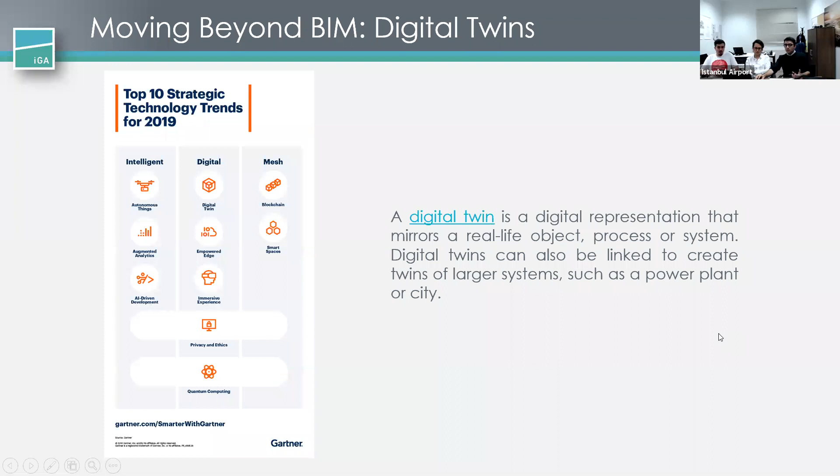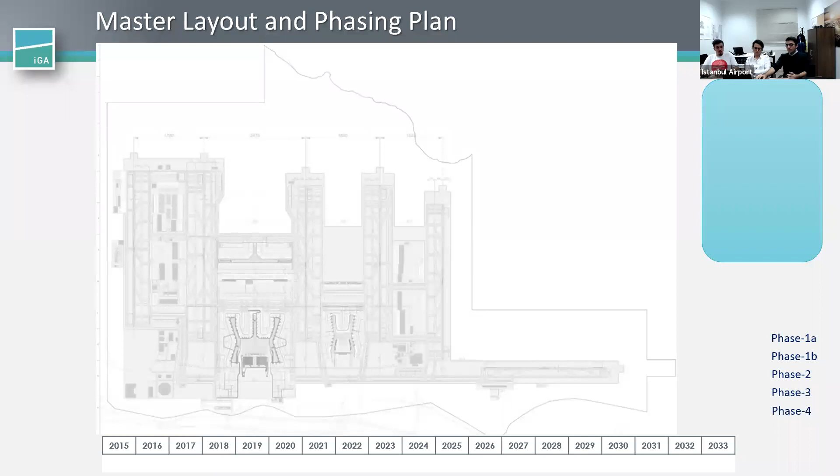Okay, so we will have some information on Istanbul Airport. We have 4 phases. So you are seeing the master plan right now. Being the world's largest airport project, the project scope consists of 4 phases. We have finished 1A right now, which includes a terminal building, 2 runways, supporting facilities, ATC tower, air traffic control tower, fuel farm, and cargo.

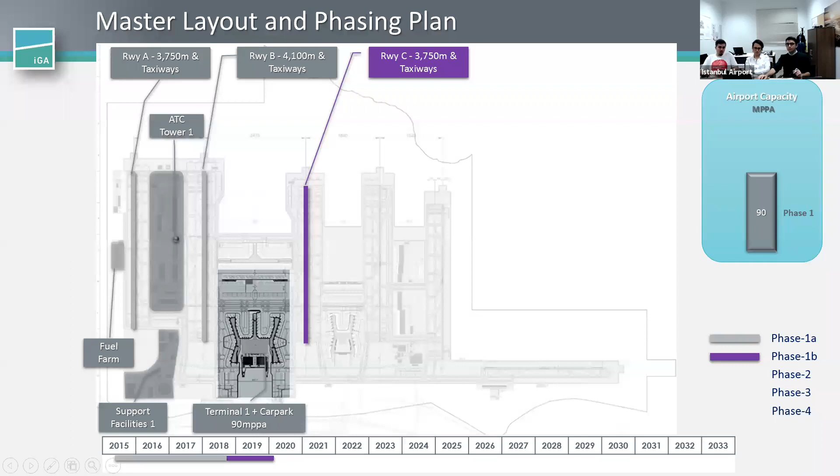And the Terminal 1 building includes an open car park which covers 700,000 square meters and more than 50,000 car capacity. And as I said, the first phase includes 3 runways, of which we have completed the construction of 2 runways. The third one is under construction right now. And the later phases include 1 satellite terminal and 3 more runways.

The total project area consists of 76 million square meters, where we will have 200 million passengers per year. Also, 350 destinations all over the world will be operating from it. So Istanbul Airport will be the very major hub that connects the entire world.

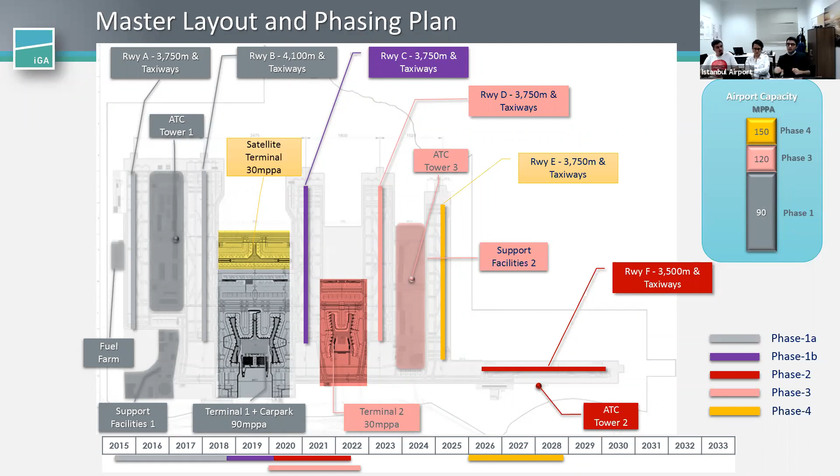So let's look at the project timeline. It's very interesting because the construction size is very huge. So a tremendous amount of coordination has been held, and a huge amount of effort, because there was a very, very tight schedule, 42 months of construction period. For this size of airport it is a very, very tight schedule.

An airport of this size would normally take twice or maybe triple that to be constructed. So we are at the end of this construction period right now. Right now the airport operation has started. We are in the 25 years of operational period right now.

So, looking at the economic impacts, by 2025 the airport will be facilitating 225,000 employees. So a huge amount of value will be added, nearly $40 billion. The project budget is also 22.2 billion euros, plus the taxes to government, which will be paid yearly over a 25-year period. So this is a very high budget.

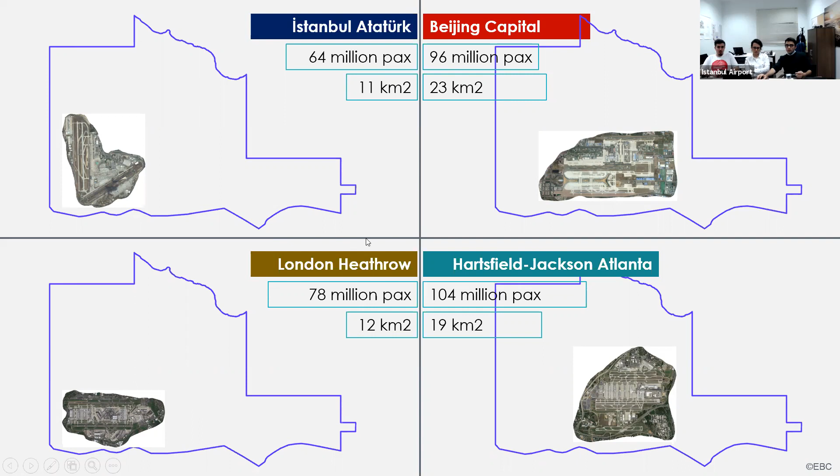So here, you can see the comparison with the known airports and the old airport in Istanbul, which is Istanbul Atatürk Airport. So you can see the concession lines, boundaries, the purple lines. Istanbul Airport has these master plan boundaries, and you can see Beijing Capital, London Heathrow, and Hartsfield-Jackson Atlanta, and compared to their passenger capacity, Istanbul Airport is one of the world's largest.

Also, having the largest airport, we have had very tough transfer operations, because we had to transfer an entire airport from one airport to another, and this was planned 18 months before the opening day. In terms of operational readiness, we call it ORAT, operational readiness and airport transfer. BIM is fully used for enhanced reporting and execution of the operational readiness and airport transfer plan.

So the preparations for the airport transfer, as I said, started 18 months earlier, including the commissioning phase. Transfer from Atatürk Airport was planned to be done in 45 hours, but we completed it in only 36 hours without any major issue, actually. And full operations were started on day one without any problem. It was the 7th of April 2019.

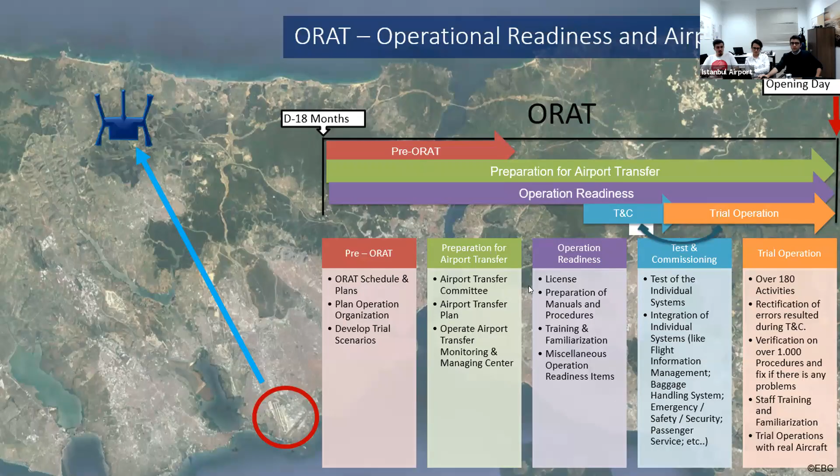So this shows one of the enhanced reports where we use BIM models for operational readiness and transfer. We use mainly Autodesk tools, BIM 360 for site reporting, and Navisworks and Revit for collaboration and coordination. This is one of our ORAT phase reports. I have to mention that.

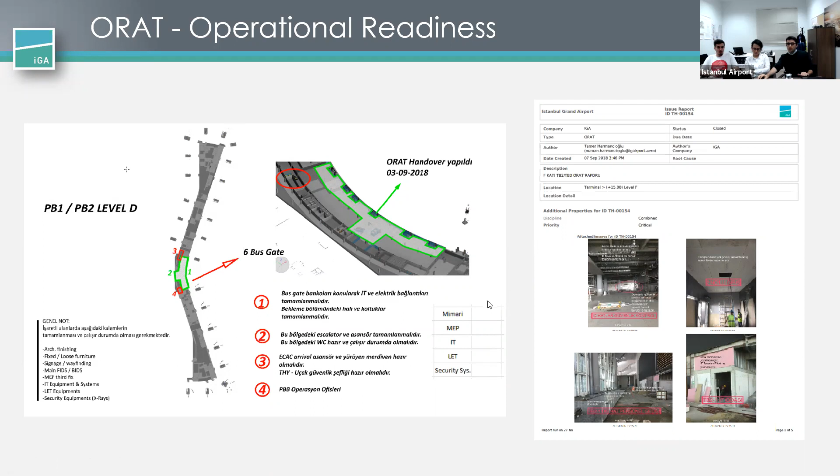So our team has also prepared an airport transfer simulation with InfraWorks that calculated the best routings for transfer trucks, low beds, and other aviation equipment. And determining the parking positions was very important. So more than 1,800 trucks delivered equipment during the process. So this was a huge transfer, I can say.

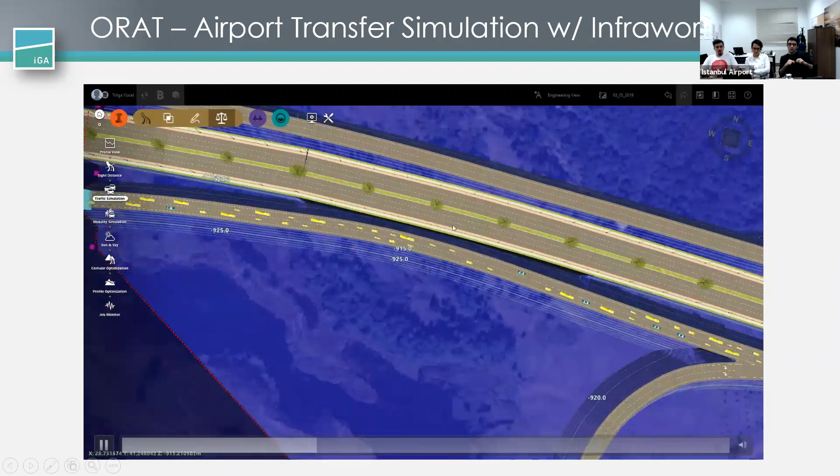So the traffic was also included in the calculations, and all the trucks, when they are leaving the starting point and when they are arriving at the destination point, all of them were integrated in InfraWorks, and we had this simulation to further enhance the transfer process.

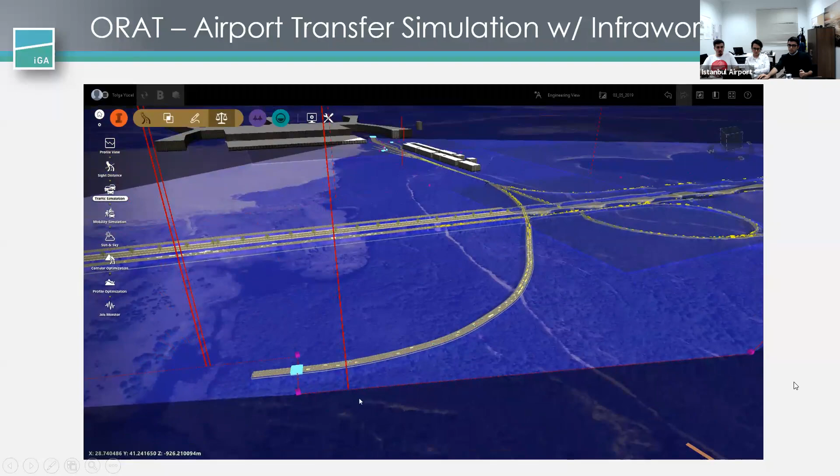Yeah, so we can now start with how we implemented BIM in this huge project. This is the basic BIM project lifecycle you mostly are familiar with. In my opinion, the first important step in a successful BIM project lifecycle is utilizing and maintaining the correct, clash-free, carefully engineered design. And the second important step is to deliver this correct design to site on time and let the right people reach the information without any restrictions.

So if you don't have the correct product, then it is nonsensical to even try to plan and deliver it to the construction. So it is very hard to finish the project on time and on budget, actually. And lastly, we are moving forward to BIM-based facility management. And we are having the huge benefit of implementing BIM for all of the phases in the project, which we will be talking about.

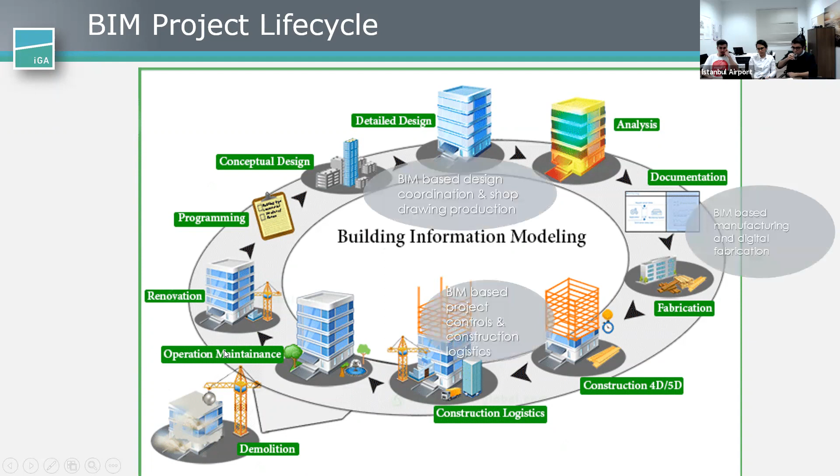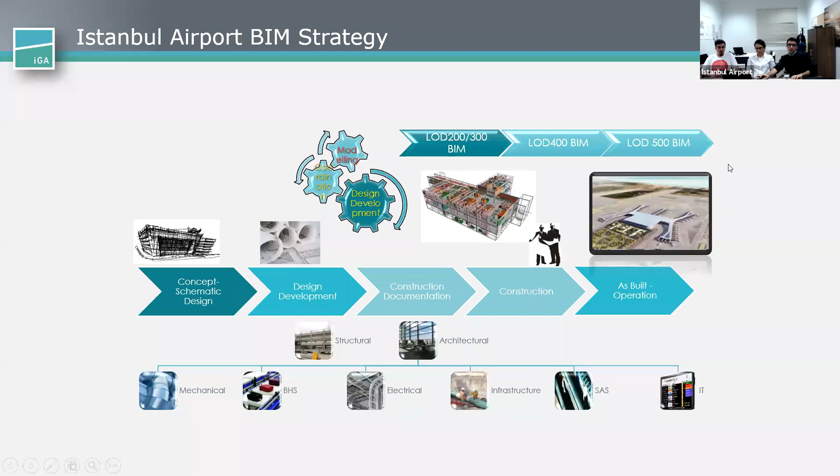So to fully integrate BIM for our project, the strategy was collaborating and coordinating all the parties, all the disciplines, including mechanical, electrical, structural, special airport systems, infrastructural systems, ICT, architectural and structural. During the project lifecycle, we have created our modeling strategy in a developing manner to match the very tight construction schedule. So at the beginning, you just cannot do everything at once. So we started from the base and we have constructed it until the operational phase, which you can see here. We started with LOD 200, 300, and we are now at LOD 500 as a development level of BIM.

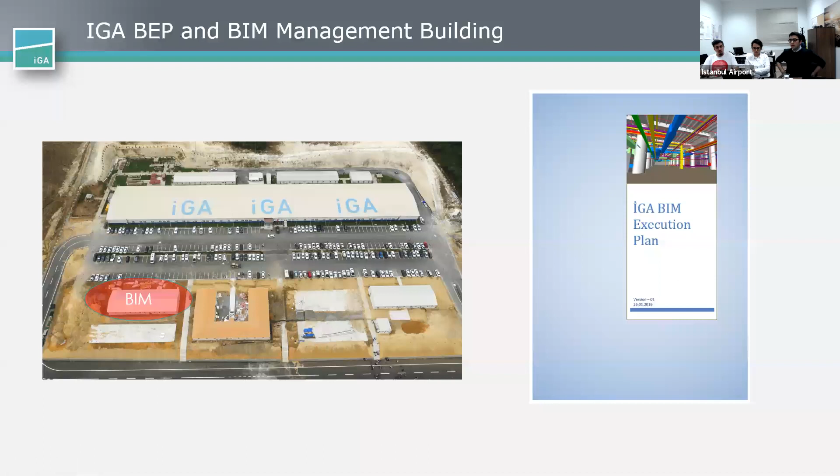Actually, what we have in this project is parallel design and construction. So we didn't have a design period before the construction. Design and construction effort was parallel, at the same time. So this is why we had a very tough period of construction. So you can see at the right hand side the BIM execution plan, which has been distributed to all the subcontractors, all the parties, internal and international.

Talking about BIM and BIM implementation, we have to mention that it is very important to apply good governance for successful project management. So these simple notions are very, very essential for successful project delivery and at the core of applying good governance in your team and even in your company. So if only one of them is absent, then you will likely struggle at some point. Let's look at them shortly.

So consistency, responsibility, accountability, fairness, transparency, effectiveness, and deployment. So if you are doing good governance in the entire project, you are likely to be successful. So one of the core necessities for BIM implementation is applying and understanding the importance of good governance, actually.

So in general, I can say that there are challenges when implementing BIM. So this is a general case. Especially in developing countries, especially in Turkey, challenges against implementing BIM can be described as overcoming the resistance to change and getting people to understand the potential and the value of BIM over conventional project coordination, and adapting existing workflows to lean-oriented processes. Also training people in BIM or finding employees who understand BIM.

Now we can look at the design and engineering coordination phase. So this is our schematic graphic for the integration of the entire project that connects all the systems and parties. BIM models are at the core of all workflows, including the design, engineering, and coordination.

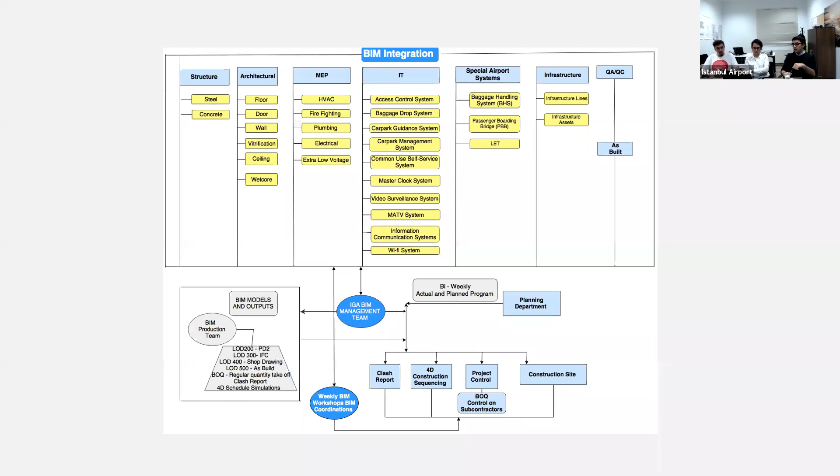All design and engineering processes are handled with a BIM-based approach here. So it was handled in a virtual environment, including digital engineering, clash-free coordination, and digital fabrication. At the core, our aim was having the correct design, and after achieving that, it was the correct time to deliver clash-free coordinated models to site, and we call it mobile BIM.

So this is not a new term actually. This is now used worldwide, and iPads, tablets, mobile are very familiar. But at the time we started this project, especially in Turkey, it was not actually done in any other project with this huge amount of coordination.

So our mobile BIM journey started after utilizing the BIM site team, who handles site engineering, quality control, test and commissioning processes on site. And actually, we can say that site engineering includes site supervision and project control, which Tolga will be talking about in detail.

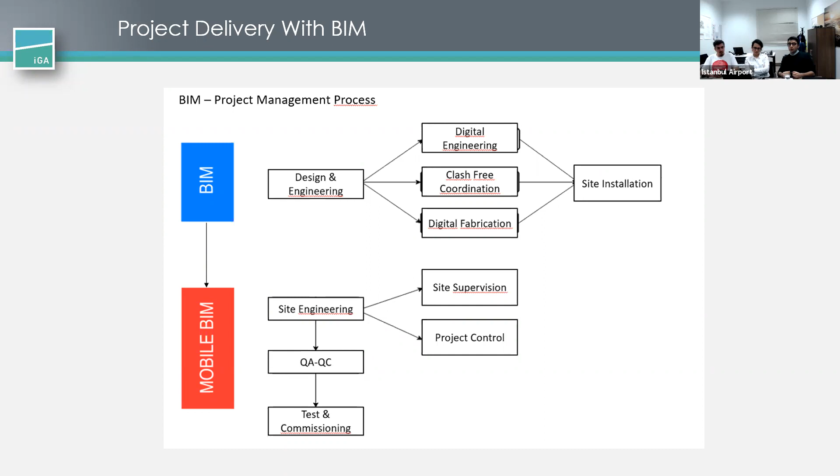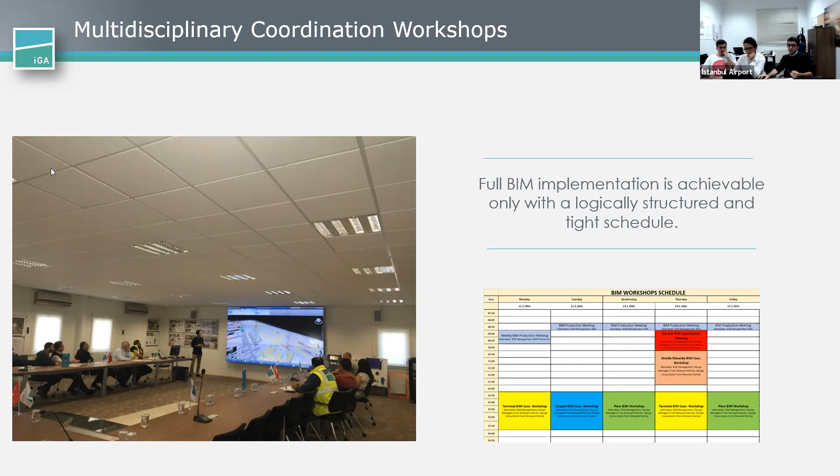You can briefly see the systems that we have integrated in our BIM model. This is the scope of our BIM model, including, as I said, all the MEP, IT, infrastructural, architectural and structural items. We have implemented all the systems into the model.

When we are talking about the BIM scope, we can say that we have implemented a total construction area of more than 2 million square meters of facilities, including the terminal, 5 piers, car park, utility center, and ATC tower. The rest of the facilities, including 170 supporting buildings, were modeled in very low detail, LOD 100. And also, Turkish Airlines buildings were modeled and integrated into the model.

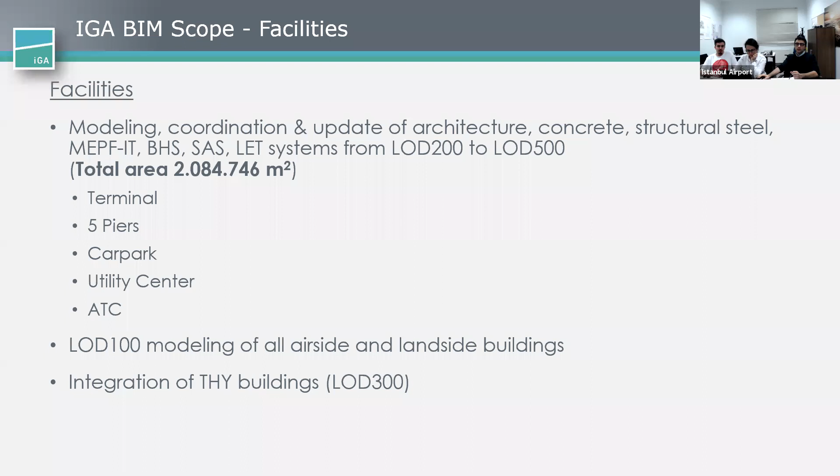Also, from the infrastructure perspective, runways, taxiways, apron and surface models are also integrated. Modeling, clash analysis, and coordination of the infrastructure network in airside and landside areas covers approximately 14 million square meters. This coordination includes the APM, automated people mover line, galleries and tunnels, drainage, electrical network and mechanical systems, irrigation, IT systems, actually all the stuff that is constructed was modeled and coordinated in the BIM model.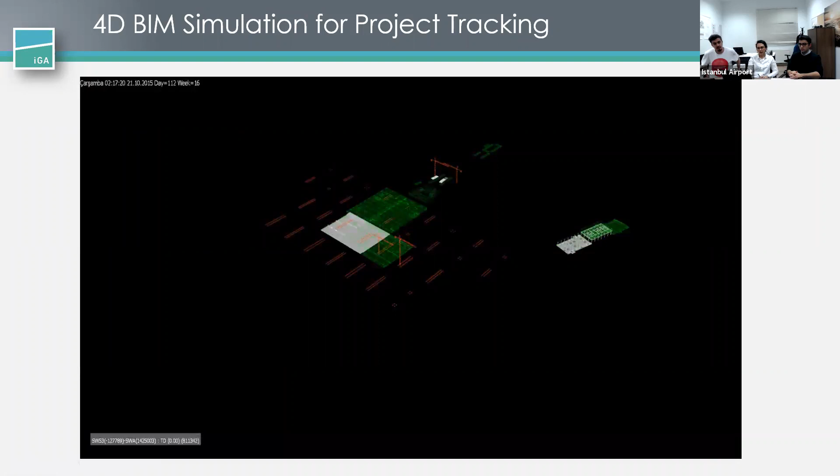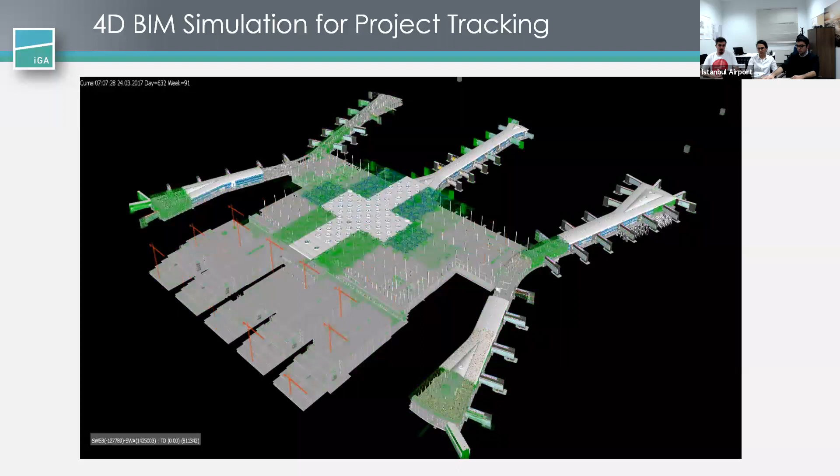This model was used for weekly executive reporting and was the main discussion point during the executive meetings. You could see on a weekly basis where you should be in the specific areas of the construction in all disciplines. During the manufacturing process, you can also see that there are a total of 56 tower cranes that cause a huge amount of gaps in the concrete slab. That's an important issue for work sequences. This is also handled and managed with the help of our 4D model.

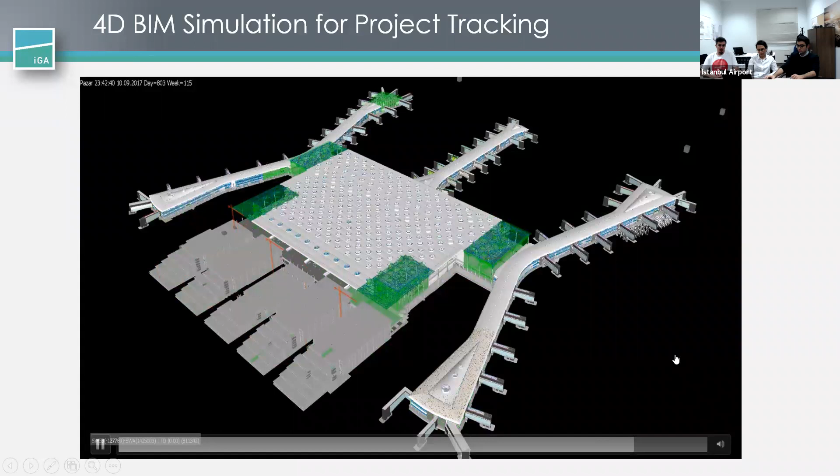Also, in here you can see there are 170 supporting facilities. Sorry. There are 170 supporting facilities other than the terminal and car park. They have been tracked according to our 4D BIM models and reported to the executive levels.

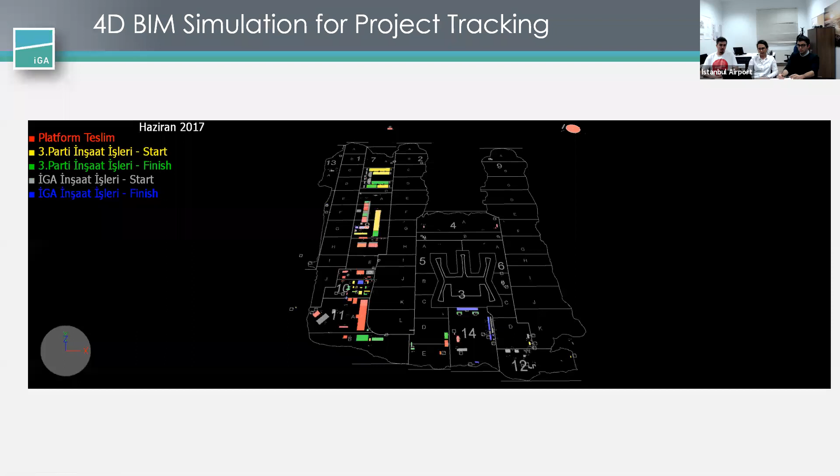Actually, as Ahmet also mentioned, this is common in today's construction works. However, when we first started these works in 2016, it was the first and the biggest mobile BIM implementation developed with Autodesk tools. We have also received feedback from Autodesk managers that our models in the cloud were the biggest in the world.

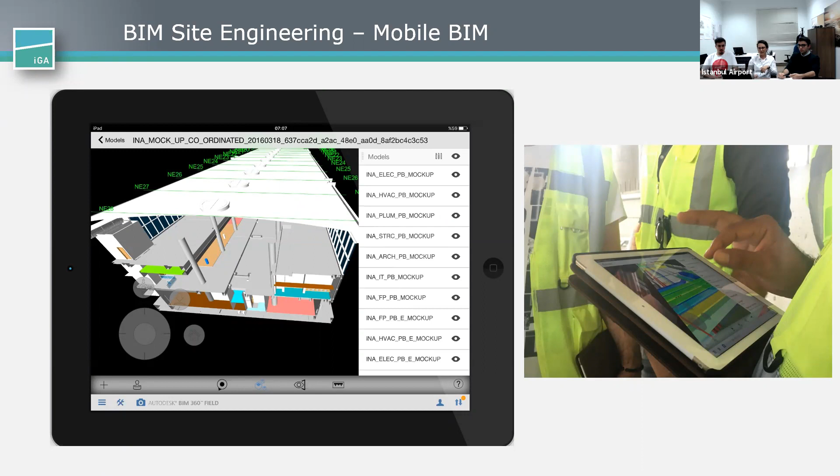Then let's talk about numbers in terms of BIM execution. More than 45,000 digital checklists and tasks assigned. 792 critical coordination issues resolved on site. And in the later slides, you will see real examples of how we have saved the project by enabling mobile workflows with BIM.

Now we will look at more numbers. More than 600,000 digital clashes are reviewed and classified in virtual environments. 240,000 critical clashes issued and solved before projects are delivered to site, which is more important. More than 8,000 shop drawings reviewed and approved by the BIM team in compliance with the BIM model. As mentioned before, 30,000 Primavera activities implemented.

150 iPads have been utilized for the engineers to have every model, shop drawings and other documents right in their hands on site. More than 45,000 quality control and commissioning documents were created across iPads. 1,300 issues raised, resolved and recorded on site by the BIM Site Engineers team. More than 1,000 people trained in Navisworks and BIM 360, and this is one of the most important achievements, leading to a change in mindsets and people transformation.

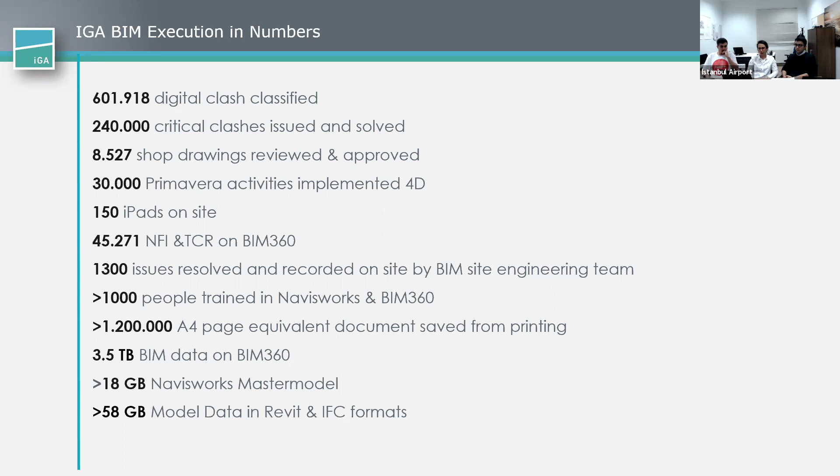1.2 million A4 page equivalent documents saved from printing, and 3.5 terabytes of BIM data stored in BIM 360. And finally, a Navisworks master model bigger than 18 gigabytes in our cloud.

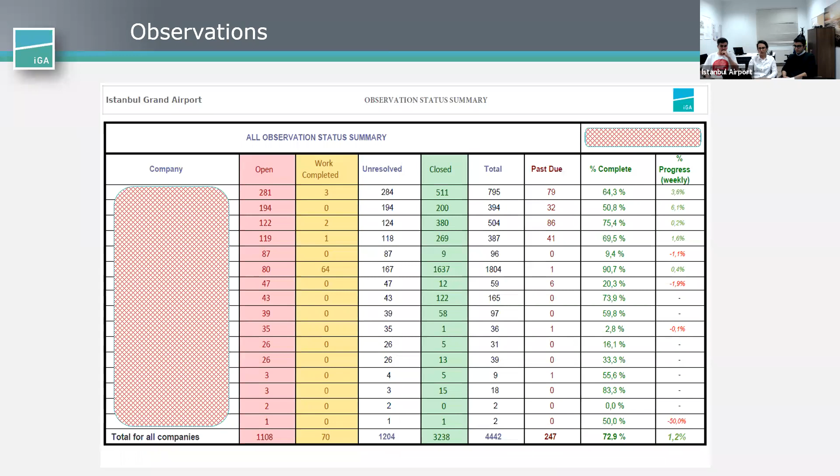This one is also our weekly report indicating subcontractor progress on issue resolutions. Upon the finishing of phase 1A, we have more than 700 active BIM 360 members using the system, and also 61 companies are registered to the system with at least one key personnel to manage BIM 360 on their side.

In here, you can see examples of BIM 360 test reports, and all issues are recorded with photos and comments on site. The BIM model is very accurate, but even if you have an accurate model, it's inevitable to have defects on site. Site supervision and project controls are also fully managed with BIM 360 by the BIM site team. Very critical issues are resolved before they cause any delays on site. Our site teams have been working with subcontractors, sometimes even to clear all the issues on site.

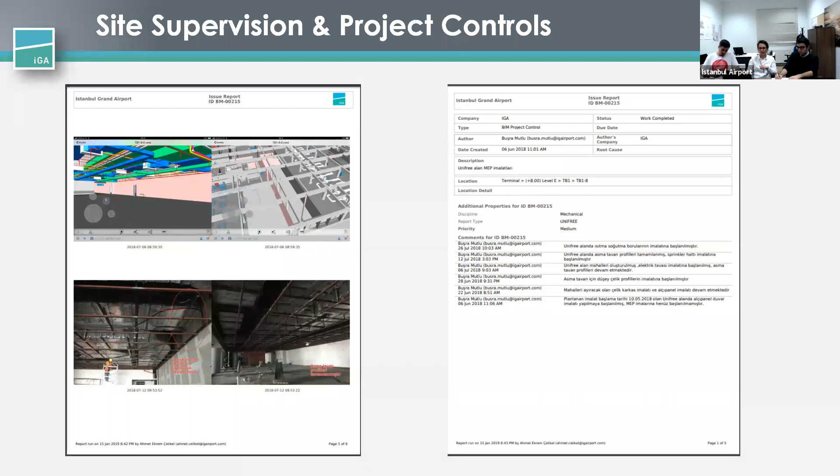BIM model elements are digital twins of the real equipment on site. Equipment has been tagged during the test and commissioning process for further use in asset and facility management. Now we are also working on the facility management model. I will present to you how we handle the construction and commissioning phases with BIM.

In here, we have the approach of developing models depending on what the project stage is. First, the construction model is developed during the construction phase. Design and coordination, clash detection, shop drawing production and control, site engineering and supervision, project control, quality control, and room data sheets depend on our construction model.

After that, we have developed the commissioning model where we have tagged all the equipment and rooms, quality checked the entire asset information, and modeled second and third fix equipment. Finally, we have developed an operational model for facility management purposes.

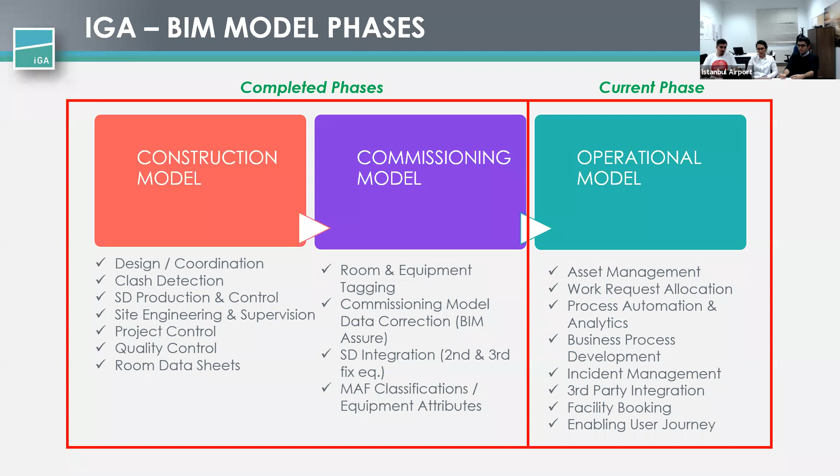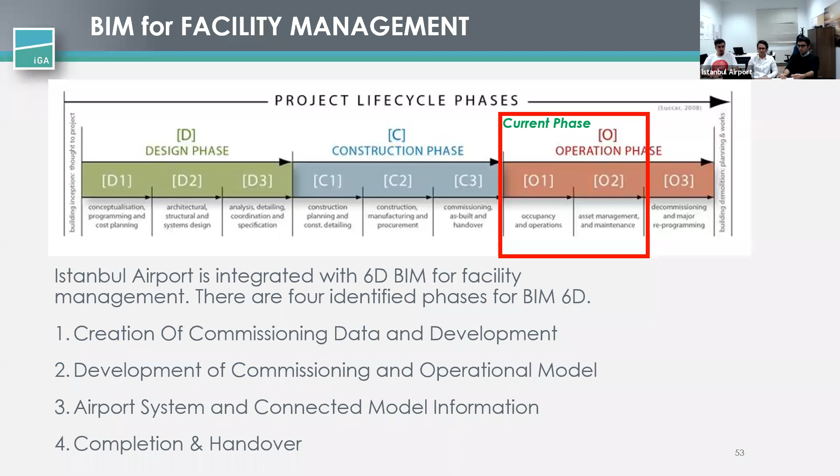This graphic gives us more detailed insight on the phases of the connected BIM strategy. We are at the occupancy and operations stage right now. There are 4 identified phases for BIM 6D. The first one is creation of commissioning data and development. Second is development of the commissioning and operational model. Third is airport system and connected model information. And the last one, completion and handover.

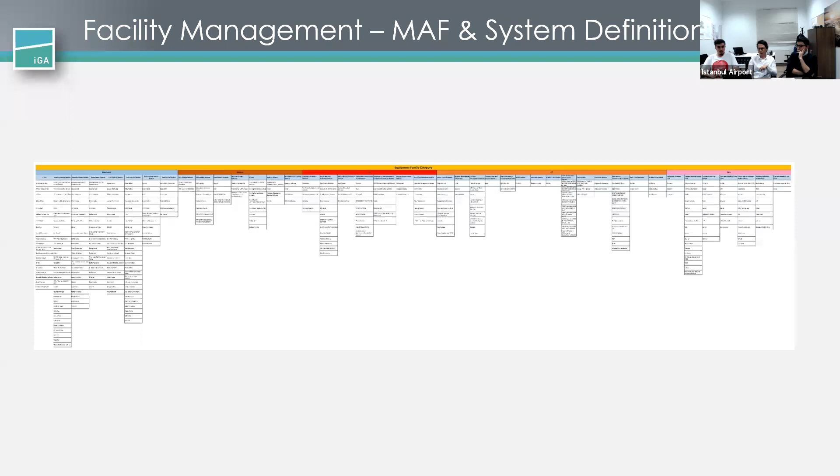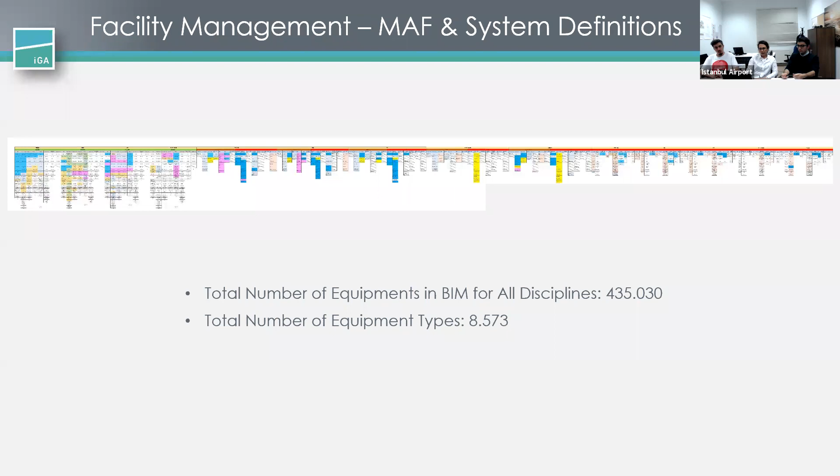This is a very interesting part actually. You can see the mechanical equipment family categories of the entire project, and I will zoom out a bit. This one is the list of the mechanical equipment, and zoom out again. And this one is the total list. This is our entire tagging and commissioning strategy for the airport systems. The total number of equipment in BIM for all disciplines, more than 435,000. Total number of equipment types, 8,573.

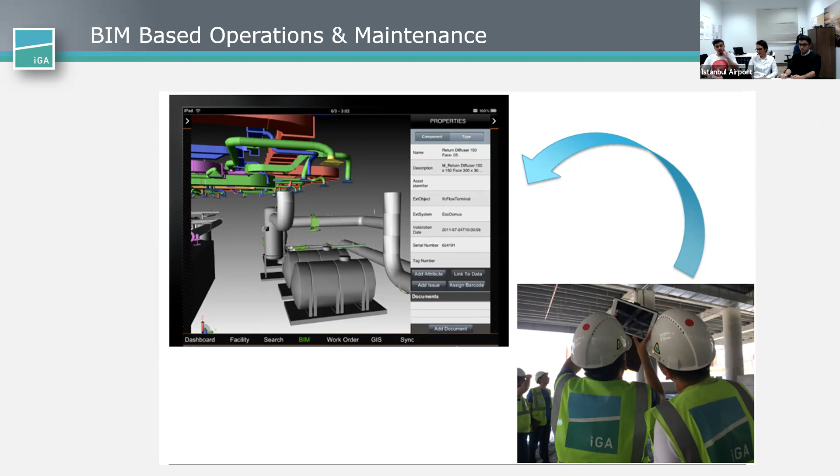Right now, we are dealing with BIM-centered airport operations, which include asset management, work request allocation, process automation and analytics, business process development, incident management, third-party integration, facility booking, and enabling the user journey. Now, Tolga will present the BIM Site Engineering part.

In this example, the clash you see here belongs to the BIM site supervision report. The supports you can see on the left belong to the electrical cable tray. After our site control, we determined that the supports should not be there. When we checked the model, we saw a wall here, so we warned site teams.

The action took place quickly, and the supports of the electrical cable tray were shifted to the left. On the right, you can see the wall construction has begun, and the installation of the electrical cable tray is running correctly.

So, how we carry out our field checks. Determination of the control method was very important for us. We had to use the right method in the right place to get the right results. We have determined 3 methods that can be used in the field controls. The first one is eye control.

We prefer this method in areas where floor height is low and field production is not dense. On the right, you can see an example about this. Another method we prefer in field checks is the measurement method with laser meters. In order to use this method, the floor height must be low again, and with this method, we achieved interdisciplinary coordination by comparing the measurements produced on the model with the field measurements. You can also see an example on the left.

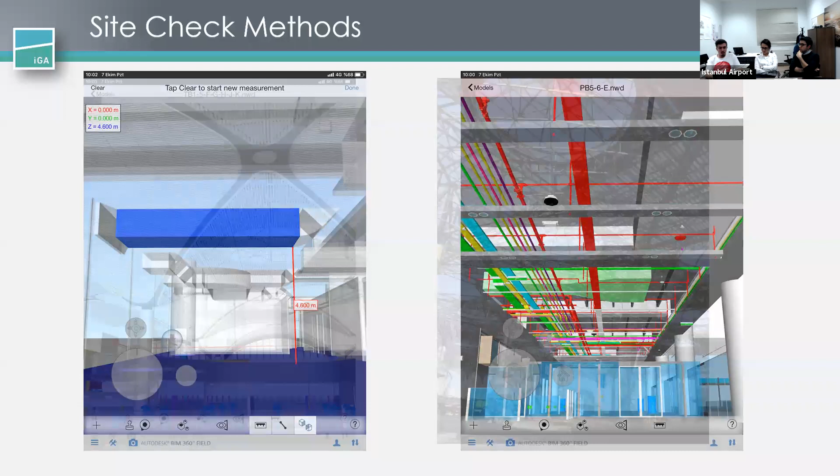Now, I will mention our third method. The area you see on the right is the departure level of the terminal building. Floor height is about 27 meters. In this area, we had to check the 34 kilometers of fire protection pipes and 17 kilometers of storm water pipes, which are located with roof steels. However, we could not use the other two methods that I mentioned before because the floor level is too high here. Therefore, we prefer the robotic total station method.

As you know, with a total station, you can measure angles, create coordinates, and then you can apply these coordinates where you want. This is the traditional method, but here there is one difference. We use the total station with BIM. This is the workflow of BIM with robotic total station. With this sequence, we have checked all mechanical systems that we had to check, managed the quality control process, and finally achieved interdisciplinary coordination with this equipment.

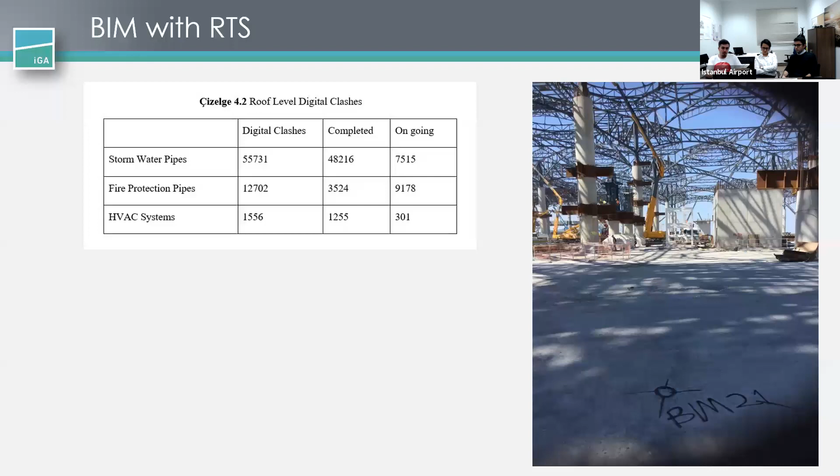After this, we create digital control points. Yeah, I think you can. Okay, and here you can see our digital control points. They are all created by Autodesk Point Layout. I will show you an example for your understanding of how we measure the mechanical systems with robotic total station now.

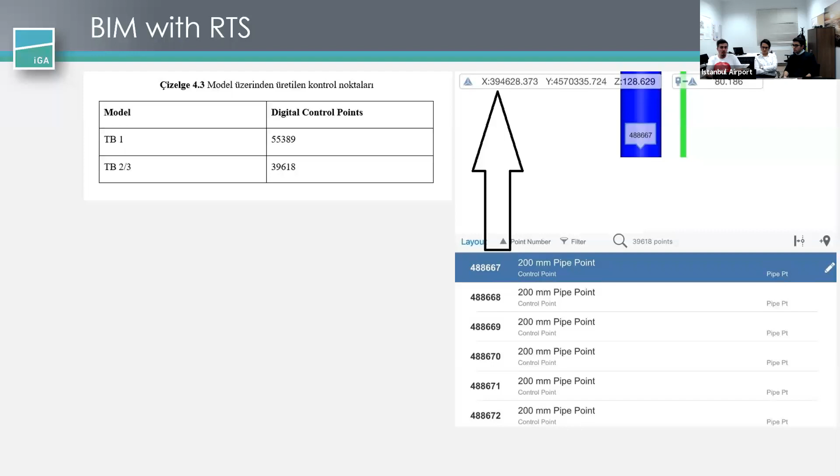Here on the right, you can see a screenshot from the iPad. You can also see the total station on the field. Right about there, but the blue pipe you have seen shows the location of the storm water pipes in our model, and the red point you have seen shows the location of this pipe in the field.

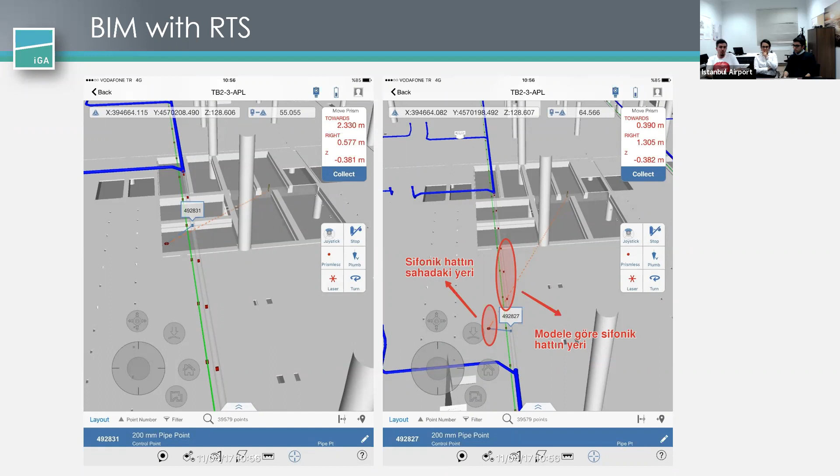After the detected step, we have created a digital report about this issue, and also you can see the site report. There is an example of a measurement report. In detailed parts, we fill in the location of defects and specify which disciplines are affected, and also in attachment parts we added site photos and measurement results. After we have created the BIM site report, we published it to our other iPad users.

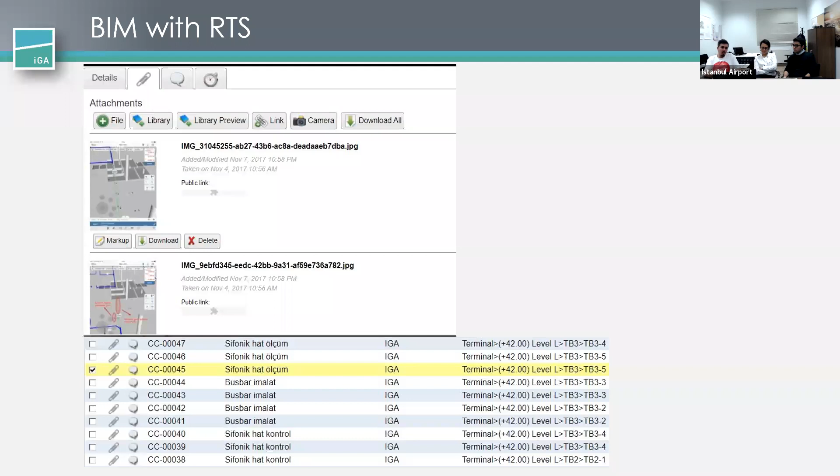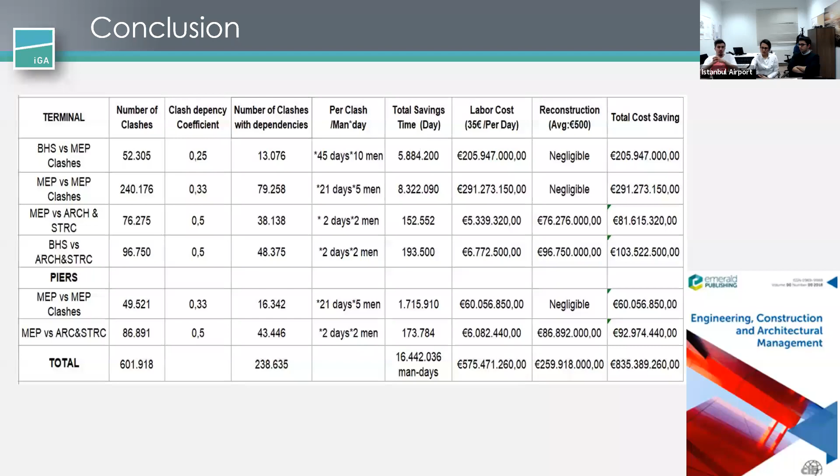Does anyone have any questions regarding the presentation or regarding the project? Thank you very much. It was a very, very good presentation.

I'm very curious. When you embarked on this project, you were doing a lot of first-time things. What did you use as some case studies during your learning process to come up with your BIM execution plan, your federation strategy, and all of these things? Because you must have had some examples to work from. What were your references?

Okay, so I can answer this question. If you want to add something, you can add. When we started this project, we had a BIM team consisting of 5 people, and our BIM director and manager were already qualified in BIM implementation and BIM coordination. So they came and formed the BIM team here with their own experiences from previous projects.

However, I can say that this amount of coordination was maybe never experienced before by anyone in the project. So we faced many problems, engineering problems, problems caused by the tight schedule, but we overcame them, as I mentioned in the presentation, with very strict management and a very tight and structured plan that we deployed here.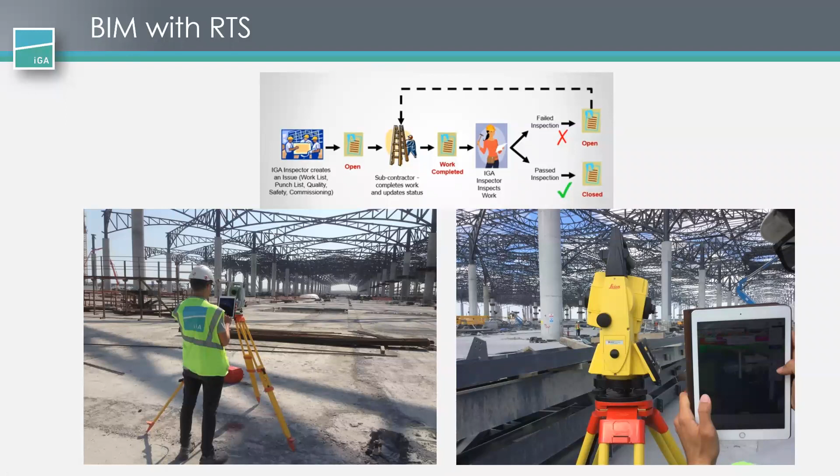And you mentioned it very well, you have two methods. I guess the first one is the site check report, which is the most efficient one, because that requires you to go to the site and see by yourself what is installed, if that matches exactly what is in the model, yes or no. But if you find something in the field which is not matching exactly what is in the model, how do you handle those issues? Do you ask subs to change the installation, or do you go to fix the model?

Okay, I get the question. Yes, those are my two questions. Okay, thank you so much, Abdul, for listening and bearing with us and for your questions. You had very important questions to ask. So I can answer the first question and you can take the second, I think.

Actually, I can say that the ownership of the BIM model is with the airport's operation teams themselves. So we didn't submit the 3D model to the owner of the project. That is the government, and they did not require the 3D BIM model. It was not required in the initial contract, but the management of the airport decided that we'll do BIM here, handle the construction in a BIM environment, and fully use BIM in the operational phase. So the handover was done internally.

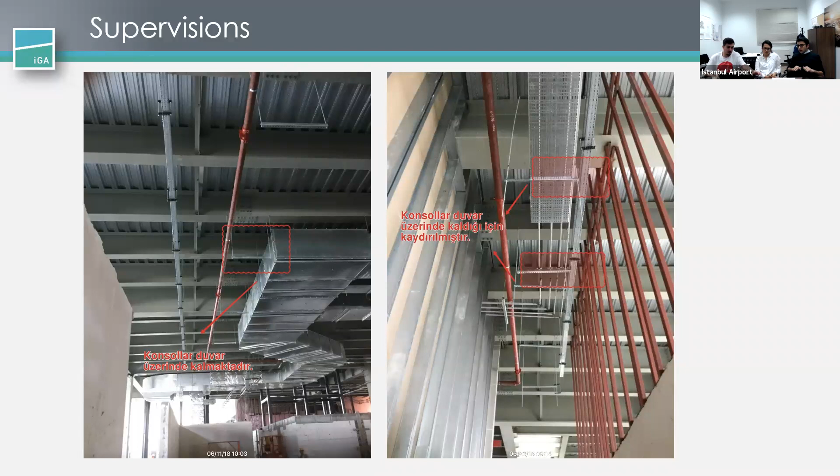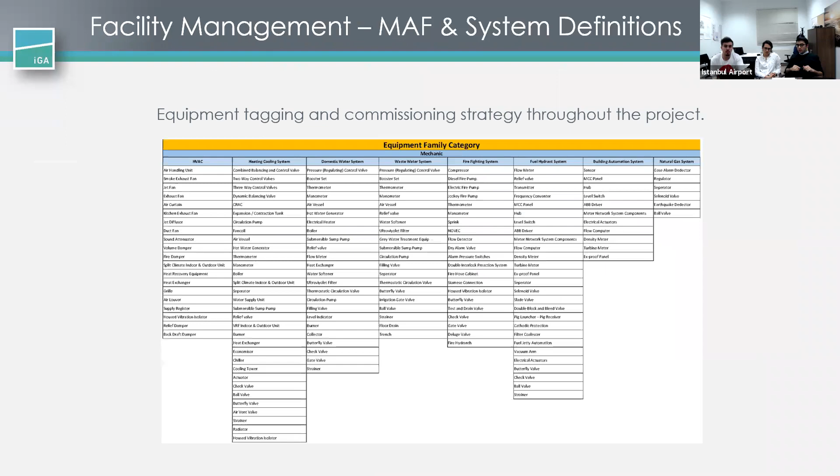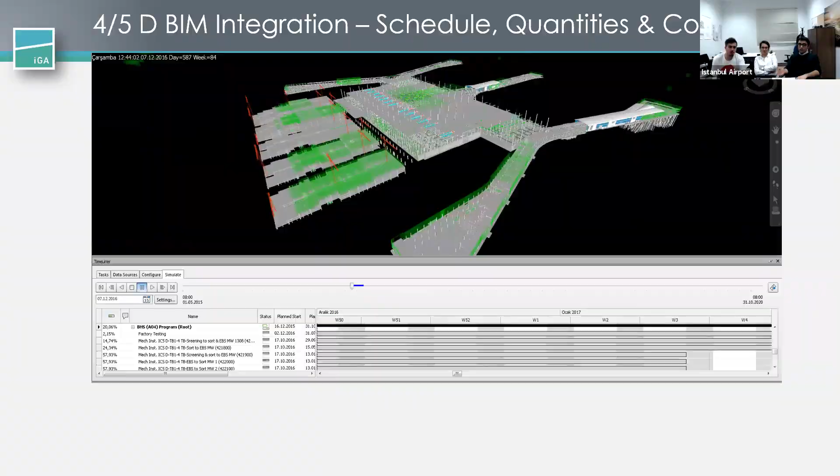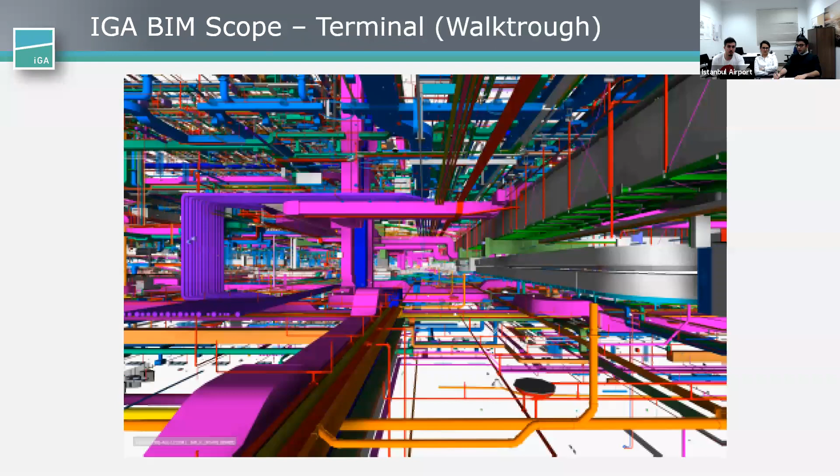At the beginning of the presentation, we briefly talked about the challenges. So I will tell you about how much time it took to implement BIM in the airport and the construction phases. However, I can say that in overcoming these challenges, the most important thing here, one of them, is top management support. If you don't have top management support, then you will likely be struggling implementing building information modeling across the entire project. The second one is changing the mindset of the people.

They are usually used to working with conventional methods. So this can be achieved by giving trainings and continuous support to them and continuously telling them why we have to implement this. So these two aspects were the main reasons why we could overcome the main challenges. When we come to the timing, it took only 3 months to set up the BIM team and BIM environment and assign the key personnel to the departments. It took approximately 3 months, and it didn't finish at that point.

It was a continuous process: we always had new subcontractors involved, new designers involved, and continuously we had kickoff meetings with them, telling them how we implement BIM here, sharing the BIM execution plan, and tracking all the time is the key element in BIM implementation. With the correct team, you can connect all the people with, for example, a very small team. You can have a very large impact because with the right tools BIM provides, you are connecting lots of people, lots of architects and engineers, to work efficiently for the project.